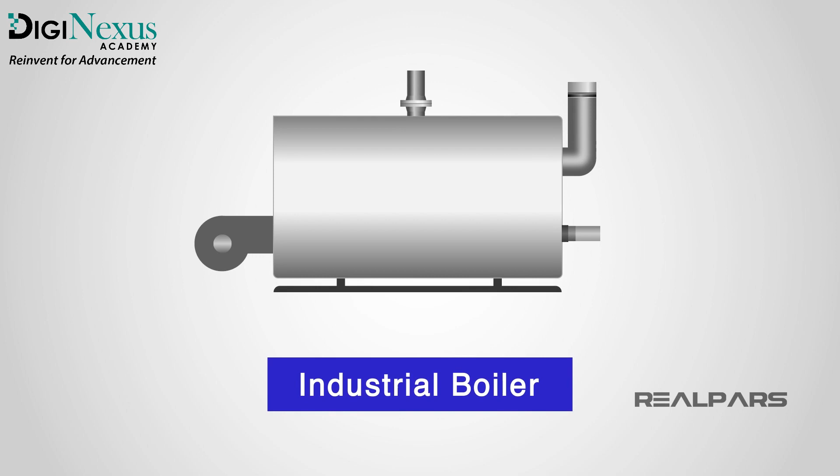In this video, we are going to discover what an industrial boiler is and how it works. But first, let us consider the term heat.

Heat is vital in everyone's day-to-day lives. Whether it be heat to warm up our surroundings or heat to be able to cook food, we all use it to some extent in our day-to-day activities.

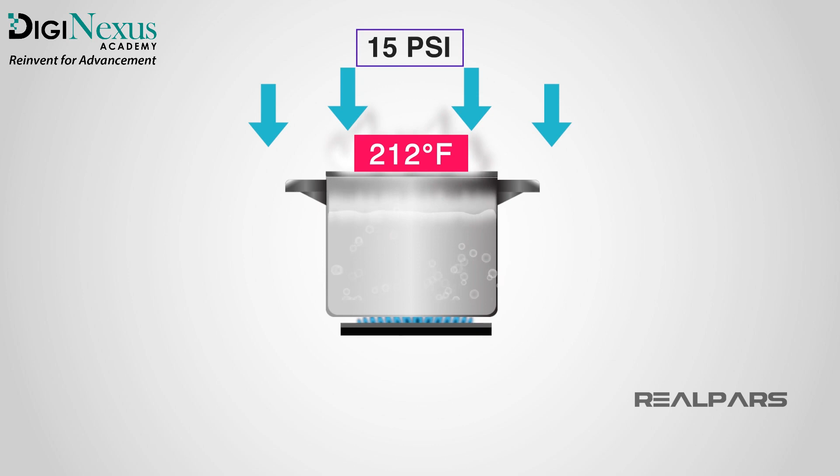Water and steam are great heat carriers and are not damaging to our environment. The boiling point of water at atmospheric pressure is 100 degrees centigrade, or 212 degrees Fahrenheit. By pressurizing the boiling system, by giving it an airtight seal, we can actually increase the boiling point.

This is how pressure cookers work. An airtight vessel to increase the pressure, to increase the boiling point. This makes the food cook in a much shorter time than if an open saucepan were to be used.

So how does this compare with an industrial boiler? Well, for a start, industrial boilers can cope with pressures much higher than a pressure cooker. Industrial boilers are often made by welding together thick steel plates, allowing extremely high pressures to be made. It has to be made incredibly strong to cope with the high pressure, as failure to do so will result in forces close to an exploding bomb.

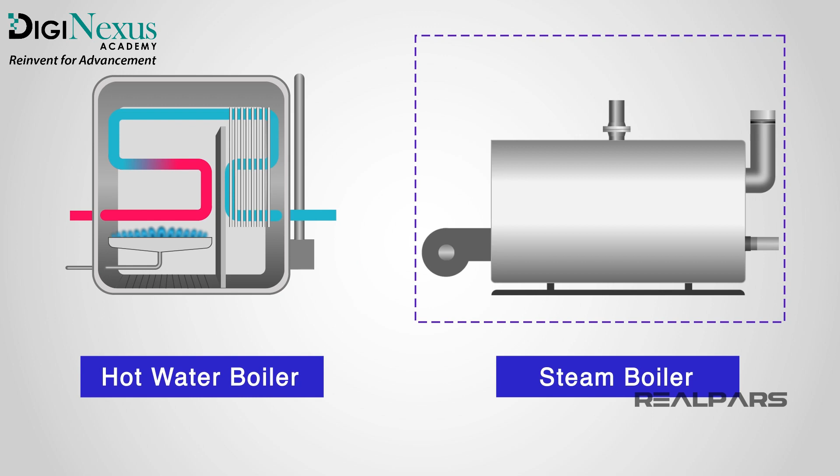The function of a boiler is to either produce hot water or steam. Hot water boilers heat water for the purpose of domestic or commercial heating and hot water supply. Steam boilers generate steam in order to power turbines for power generation and various other industrial heating applications.

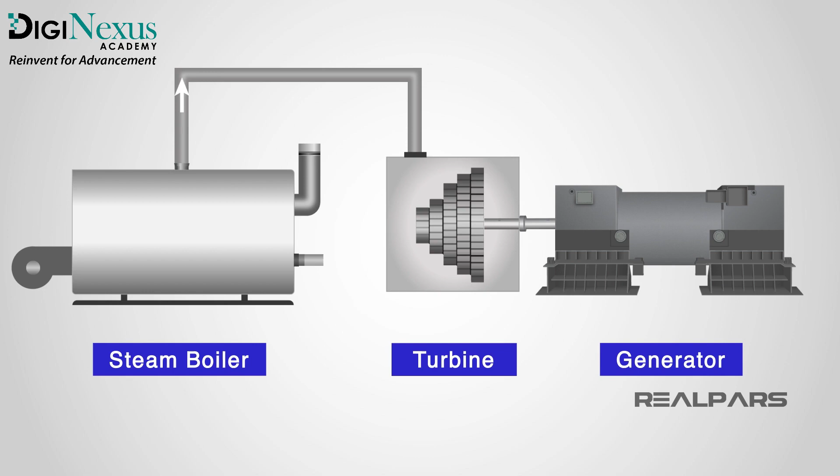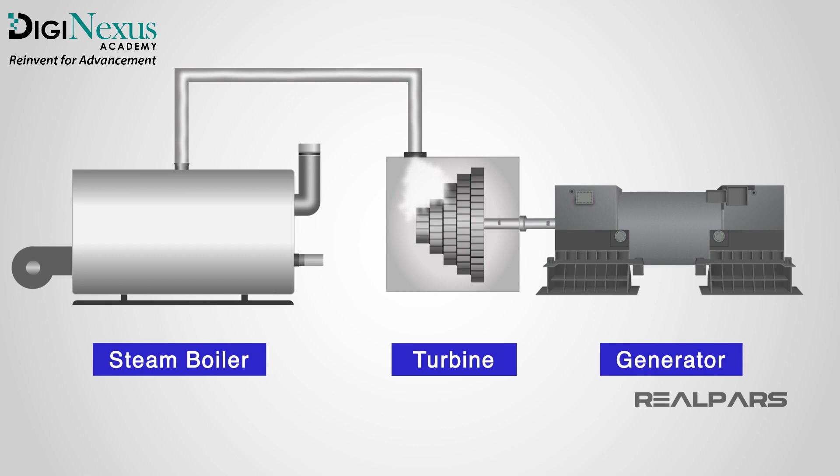To visualize the effects of steam generation using a boiler, think of the steam powering a turbine. When the steam passes through the blades of a turbine, the force turns the blades and accelerates the turbine. Steam contains an enormous amount of energy, so it makes the turbine quite efficient, and depending on the fuel used to boil the water, quite energy efficient too.

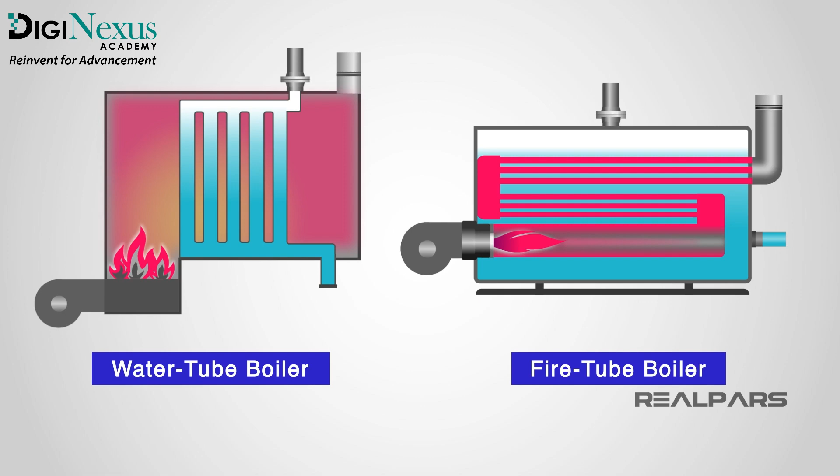There are different types of boilers for all sorts of different applications. We are going to cover a couple of the different types, including how each of the methods is able to generate heat, so you can familiarize yourself and be able to correctly identify them.

Firstly, fire tube boilers. The typical makeup of this type of boiler is a furnace, a water tank acting as a boiler, and a smokestack. There are tubes running through the water tank carrying the heat from the furnace, and the smokestack vents the heat and gases caused by the heating effect so that the pressure does not continue to rise above the intended level.

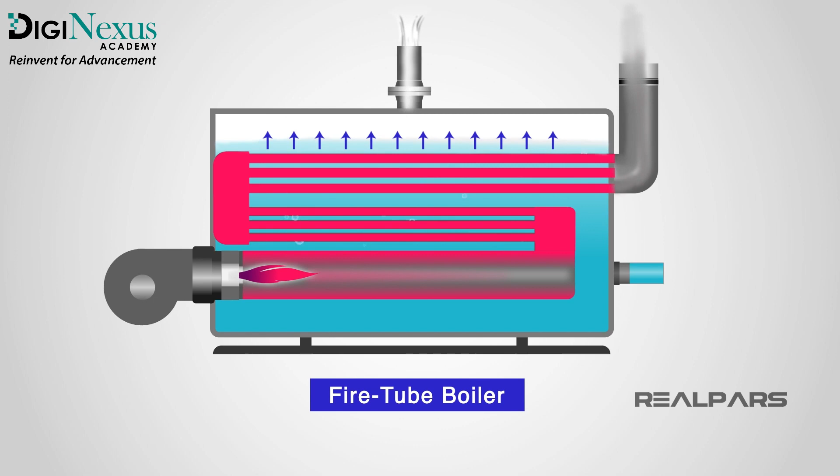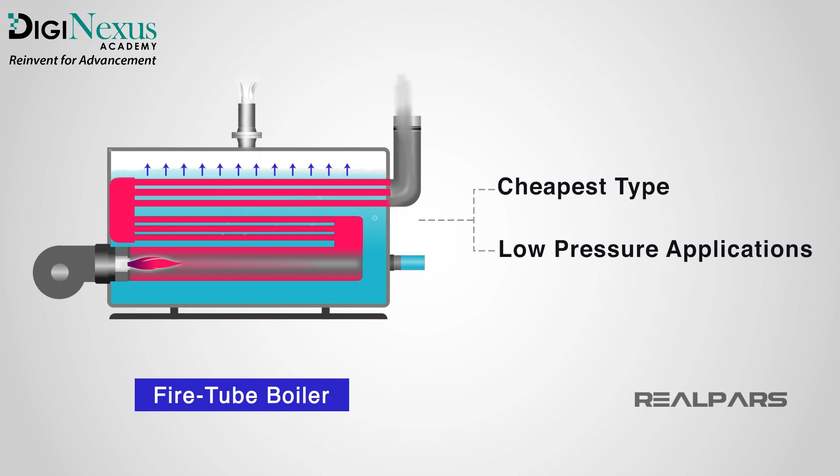So, the fuel is burned inside the furnace. The tubes transfer the heat of the furnace through the water in the tank. Once it is heated, the steam generated is moved along downstream. Fire tube boilers tend to be the cheapest type of boiler to produce, as they have a fairly simple construction, but are typically limited for low to medium pressure applications due to the thickness of the outer shell containing the water.

Now that we've covered the fire tube boiler, let's have a look at a water tube boiler. The design is fairly similar to a fire tube boiler, but instead of the furnace heating fire tubes to heat water in a tank, the furnace heats water tubes inside the furnace.

In the same way, a fuel source is burned in the furnace, causing the water tubes inside to heat up. Once again, when the water is boiled, steam is generated and moved downstream. A water tube boiler is more thermally efficient than a fire tube boiler, but they are more complex to construct, and the quality of the water can be a limiting factor. The water may need filtering to operate most effectively.

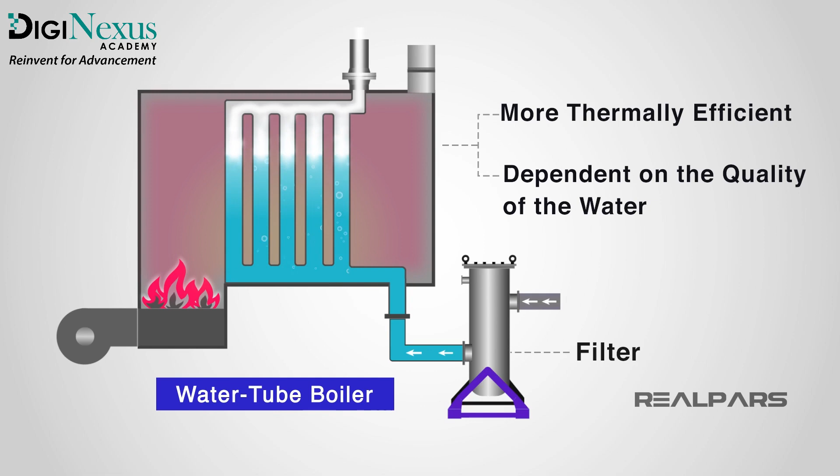Combustion is the process of burning a fuel source. To create a reaction, there must be a fuel source, heat, and an oxidizing agent.

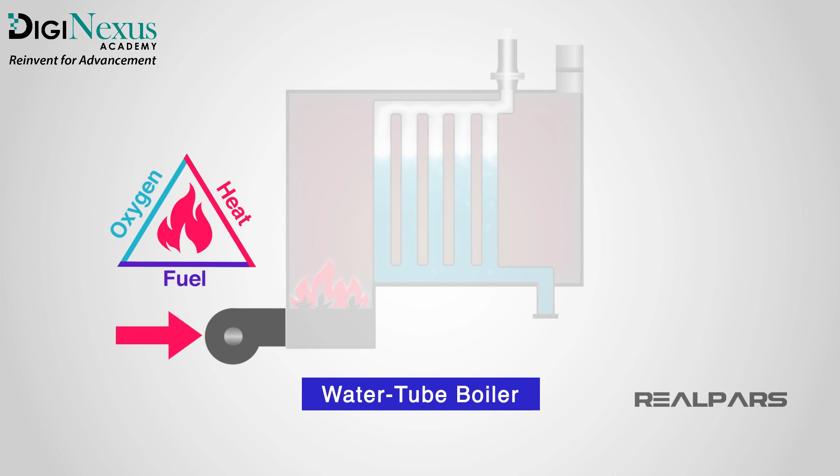Boilers can be designed to burn a specific fuel using any number of different technologies, but the main component to consider here is the heat source, or otherwise known as the fuel. The fuel is one of the most important aspects of a boiler, and is what burns inside the boiler to generate the heat. There are many different sources that can be used.

Coal is a standard fuel source. In industrial boiler applications, the coal tends to be ground to a fine powder as it burns more completely than traditional bricks.

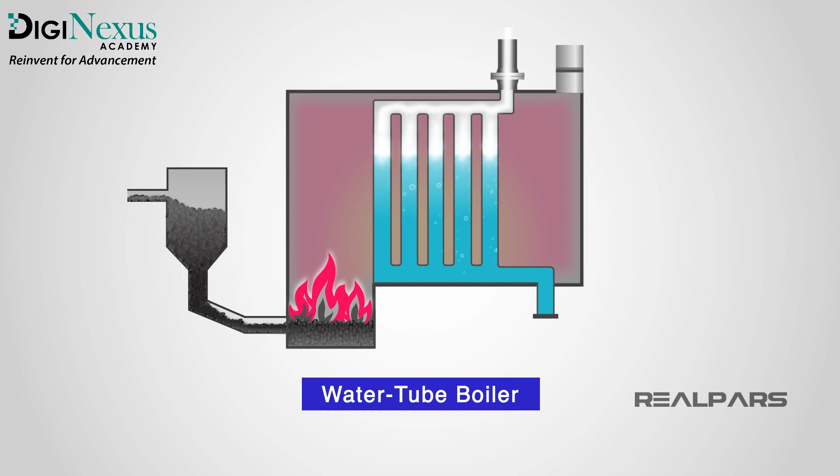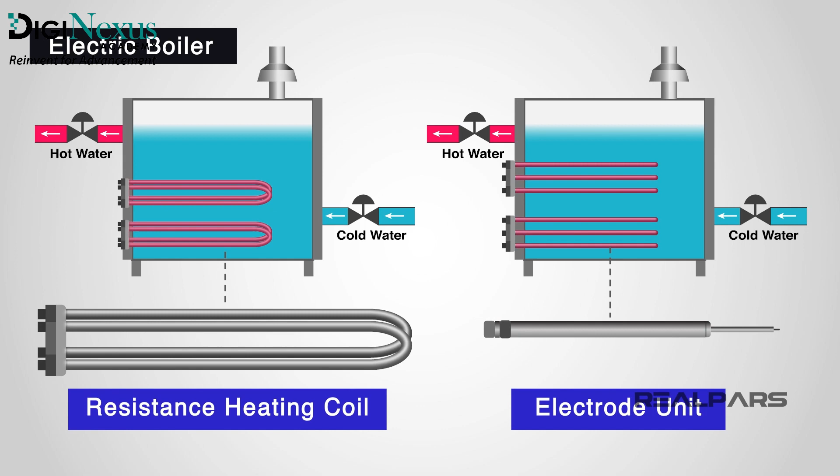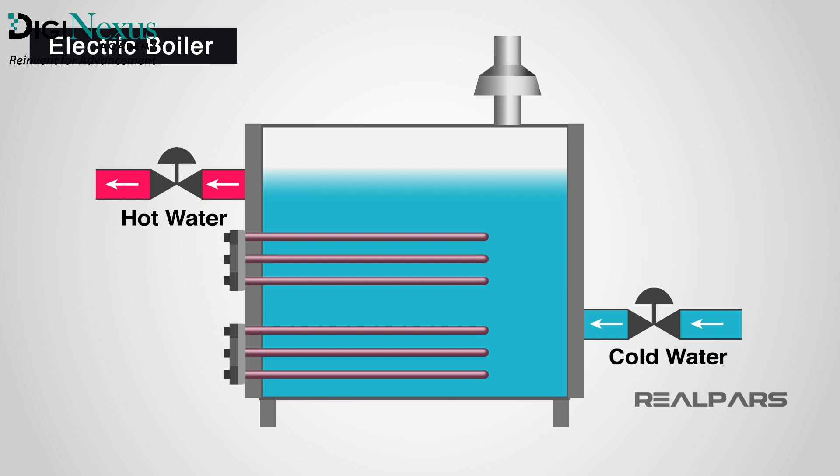Electric can be used as a heat source, either by resistance heating coils or electrode units. Electric would normally only be used for smaller commercial or domestic use. Electrode-type applications require very high water quality and conductivity to work effectively. Maintenance is key to electrode-type applications too, as cleaning the insulators is required to prevent arcing between the electrodes.

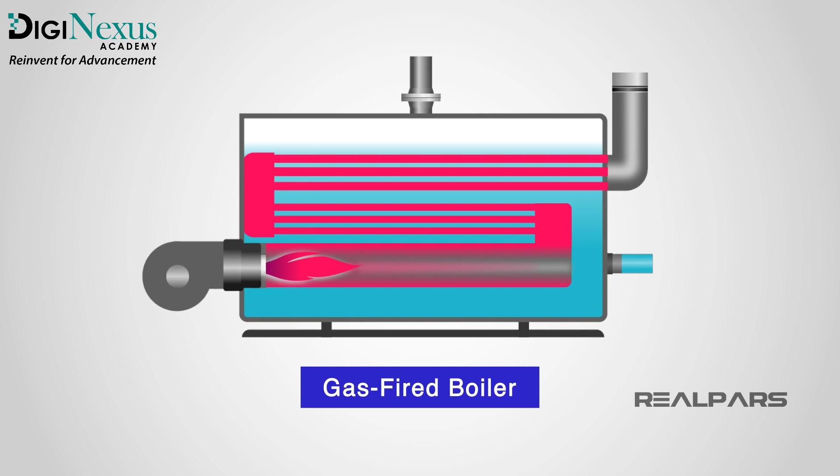Gas-fired boilers work by using either propane or natural gas, whereas oil-fired boilers work using gasoline or petroleum-based fluid.

So let's now recap a few of the things learned today. Boilers are an extremely versatile and important piece of engineering equipment, not only for us on a domestic level, but at a commercial and industrial level too.

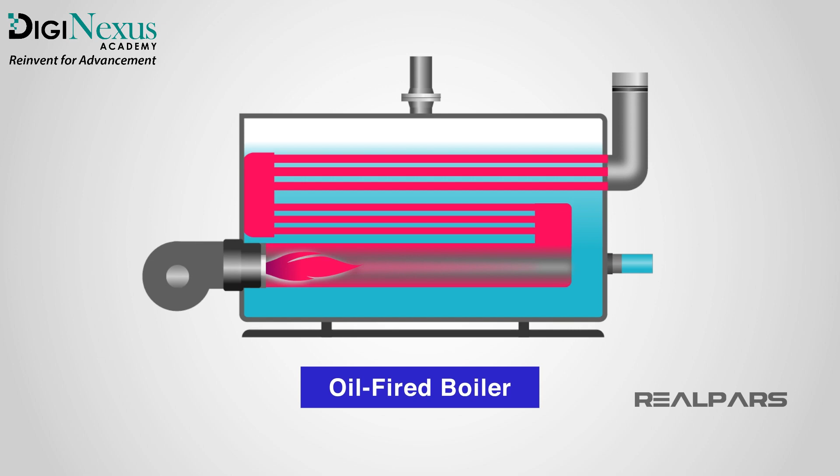There are so many different applications that boilers are used for. They are used in the food industry. Food at various stages of production needs to be heated or boiled as it is processed.

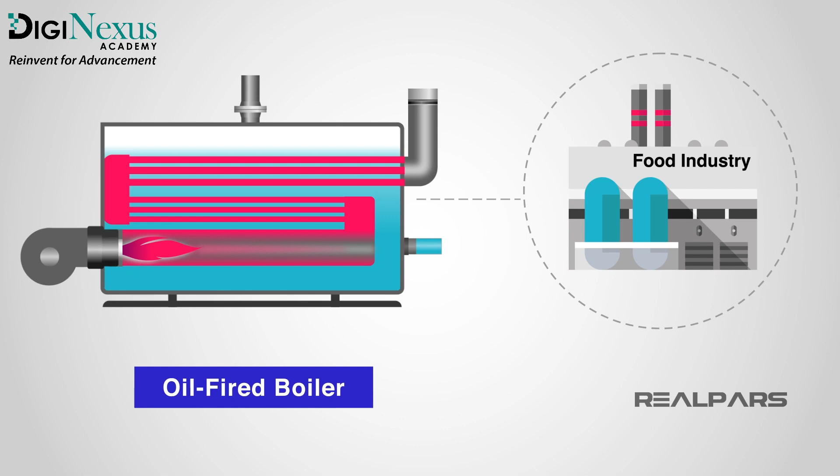Another interesting use of boilers is in the brewing of beer. During the beer brewing process, the malt needs to be ground and mixed with water, a process called mashing. This mash is then heated using steam for several hours before the yeast is introduced to trigger the fermentation.

To generate heat, we need a fuel source. The reaction of having a fuel source, heat, and an oxidizing agent allows for a reaction to take place. This keeps the heat source going. By heating tubes of water and using fire tubes to heat a tank, steam is produced at extremely high pressures to produce enormous amounts of energy.